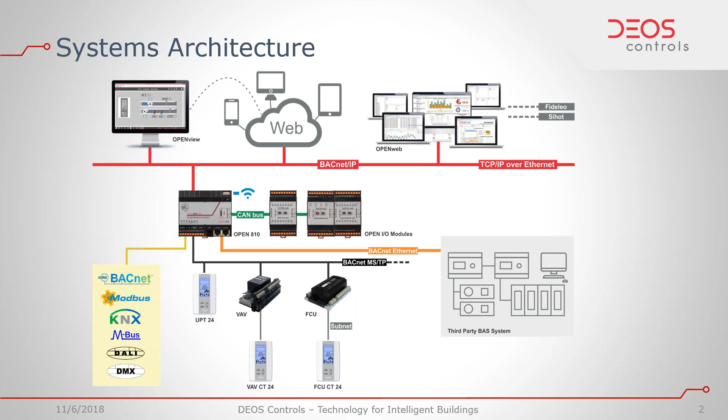Now, I will start out introducing a little bit what we have. We have everything every manufacturer or any supplier has. We're using I/O modules, we're using CAN bus, we have our own web browsers, our terminal devices. We're using it as an integration tool for Modbus, KNX, M-Bus. We're doing some M-Bus metering in North America right now, especially in Vancouver. KNX is more European, and DALI is more on the East Coast. So we can cover a wide variety of integration units.

This is our Open 810. Our Open 810 has CAN bus, RS-232 ports, RS-485, and 2 Ethernet. It's a switch, and it comes with 1,000 BACnet points and 1,000 Modbus points. When you have a KNX version, you have 1,000 data points, and DALI up to 256 addresses.

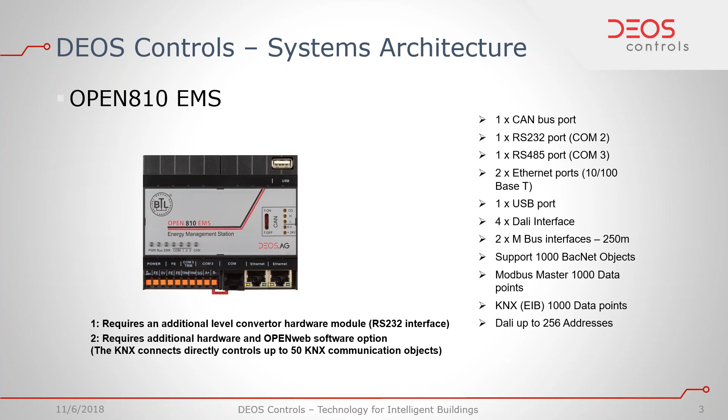Now we have two things. You can either plug it together and put the jumper in here, or you can mount it. You can run it separate with a PKM. You can run up to 5 kilometers. You can put I/O modules throughout the whole building.

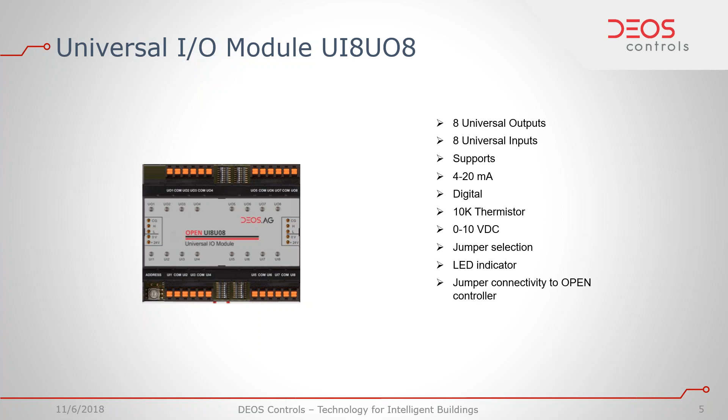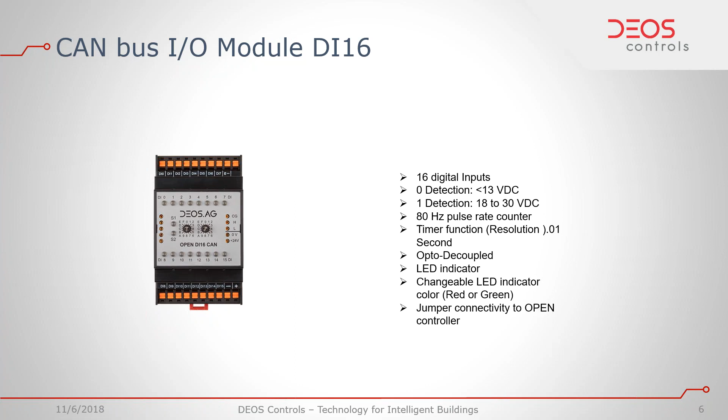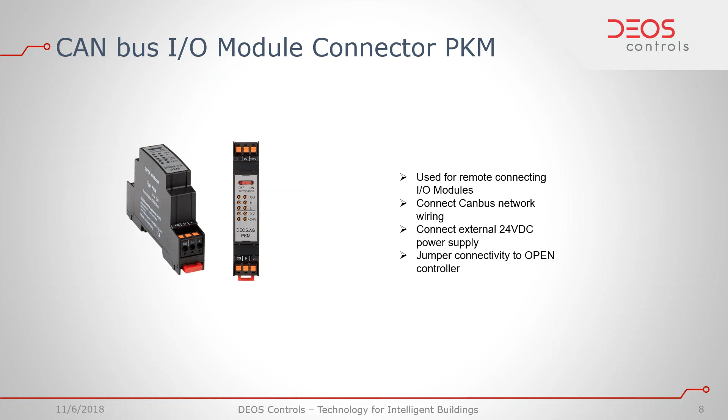And this is a PKM. When I want to mount it remotely, I can plug it in and then I can run to my next module. I will show you here, and then it will be sitting together in a block like this. So I'm coming in here. I can put an external power when I want. When the distance is too great, I always recommend putting an external power, this relays it up, and then go with the network out and go to the next block of I/O modules.

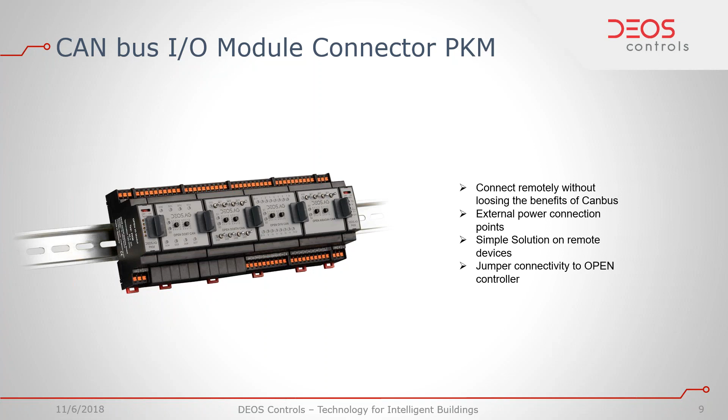It's very handy when you have a mechanical room and you have an MCC center. You put the PKM module over to the MCC center, run it in CAN bus. CAN bus is considered to be an internal network. This is how it works. You come in, and then you have CAN bus, and then you can run up to 5 kilometers. So this is the distance which we have.

So now I have to see, can I move this a little bit down here? Okay, I can. So I don't break anything.

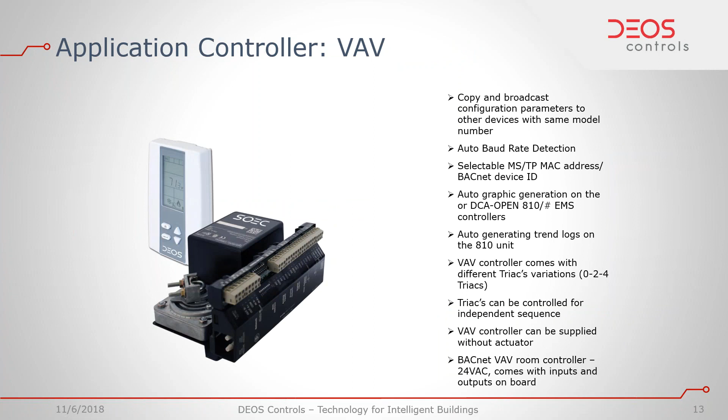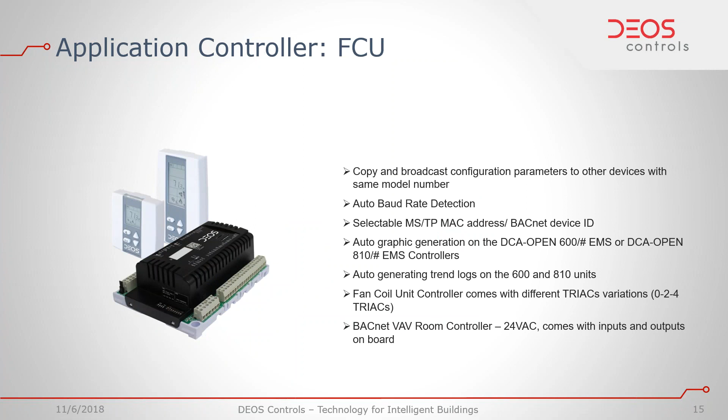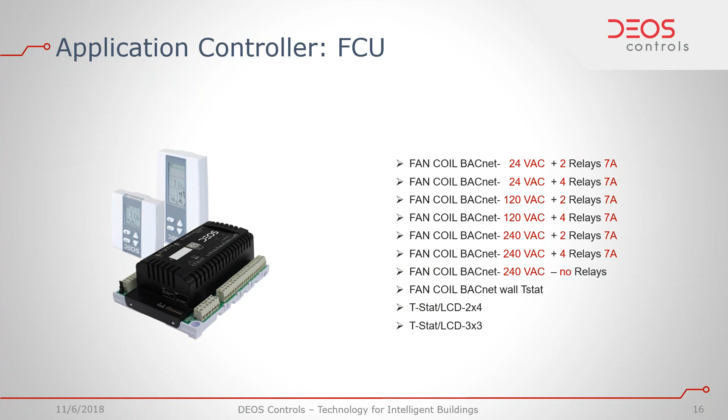So this is the application controller, the UPT24. It's similar to what the Honeywell T7300 is. It has a time clock. It has inputs and outputs on board. It's a very nice product because we're using it for rooftop units where we daisy chain them and then put them on an 810 and host it on the web. It's a very versatile product and people like it, and I hope you will like it too when you try it.

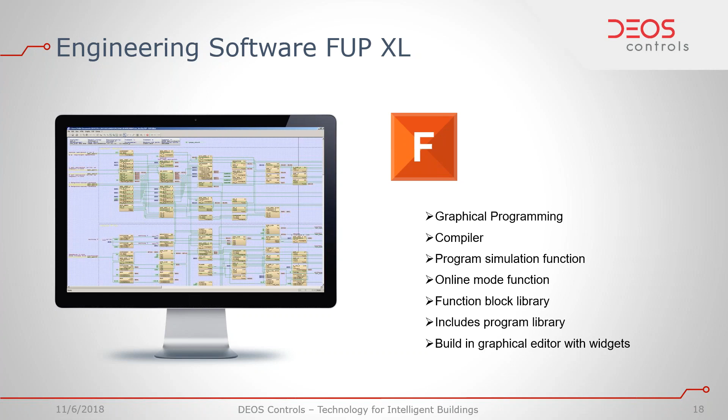Then this is our engineering software, FUP XL. On level 1 and 2, you don't need it. When you come to level 3 and 4, this is where you start doing the programming with it. Everything is function block. I don't know how many people know Tridium. When you know Tridium, you will see right away a lot of similarities to it. And when you dive in a little bit deeper, you will see we do some things differently than Tridium, especially when you bring in some points and you're programming.

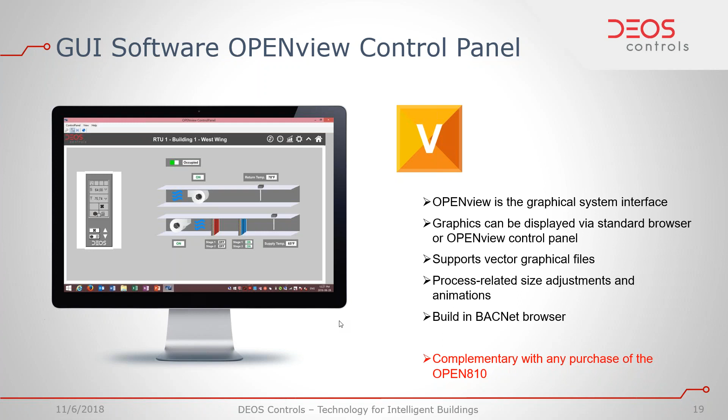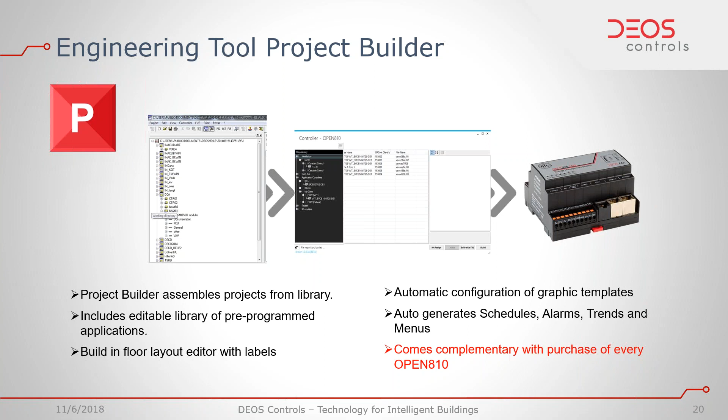So this is how you download it. We also have peripheral sensors. We have energy meters. We have everything that everybody else has too.

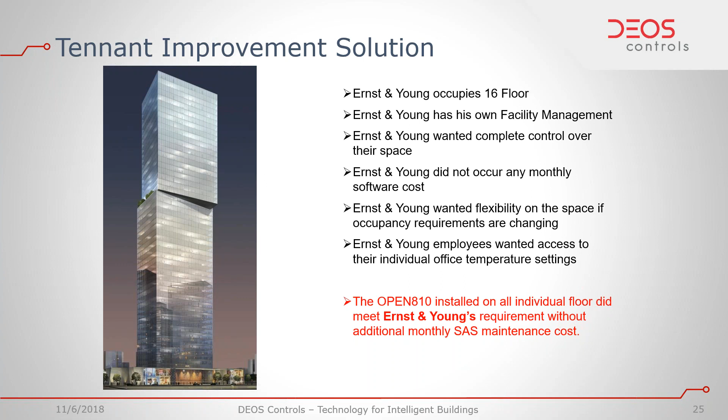Now, one thing we did was a tenant improvement project. It was Ernst & Young. Ernst & Young owns 16 floors of this building. He did not want to pay any SaaS costs. He said, I have my building, I have my floors, I want 16 floors, and I don't want to buy it. The 16 floors are mine. I don't want to pay any licensing fees or any annual renewal fees for service.

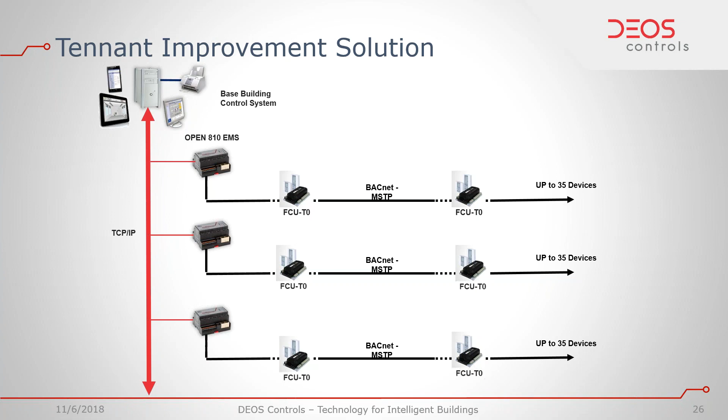So what we did, we put in all these fan coils. It's 16 floors, I think it's over 560 fan coil units. And this is how we did it. We put an OPEN810 on every floor, which hosts all the graphics. It hosts all the floor plans, all the alarms, all the graphics. And they are daisy chained. And here you see on every floor, it's an 810. You click on it and then you jump between the floors.

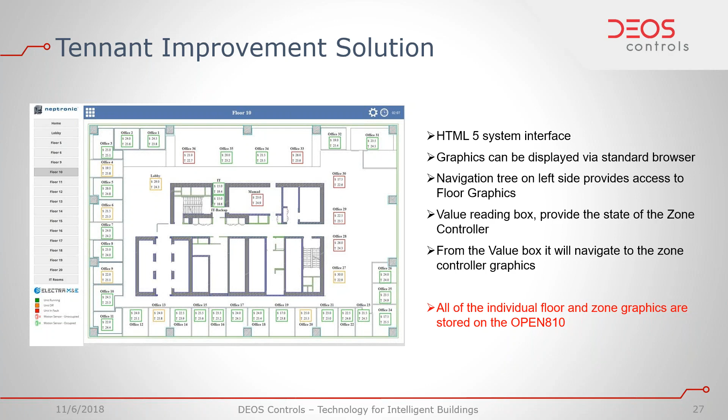I go between them. And because you're hosting everything, you can tell the front end, the enterprise solution in a building, how many points you want to give it. And what it does, it reduces the SaaS cost for anybody who is in a building. We're doing this one, 16. So this is the typical floor plan, the equipment graphics.

And usually it's very efficient to engineer. This is why we're very strong on it. We're very efficient. Anybody who wants to put the system together can do it very simply. We show him once, and usually they can do it.

Sometimes they come and say, here in our case, it's Engenuity. You would ask Engenuity and say, hey, listen, I have a tower with, say, 40 floors, and I have fan coils, 6 types of them. And then Engenuity would say, okay, you need 4 templates, and we'll give you a price. And then you would have it right away. The 810s would come right away loaded with all the templates and the floor plans. Does it make sense? Oh, sorry, I don't have feedback.

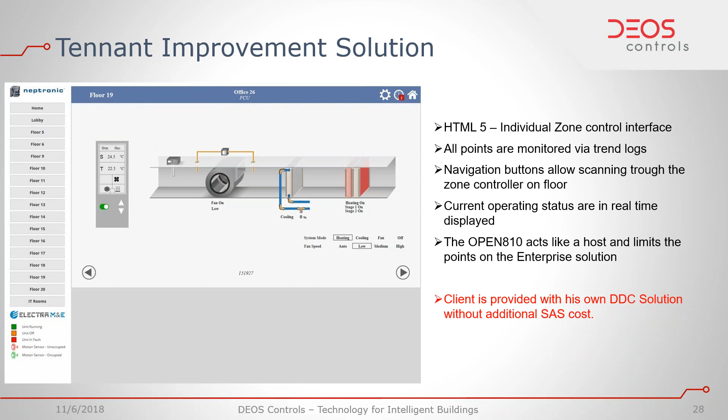Okay, now with conversion and enterprise, you have your VAVs, and then what usually happens, you have a plant controller with routing capabilities, and then you go to the enterprise. What we did, we took out this controller, put the MSTP on here, and host everything on here. Alarms, graphics, floor plans, everything sits on here.

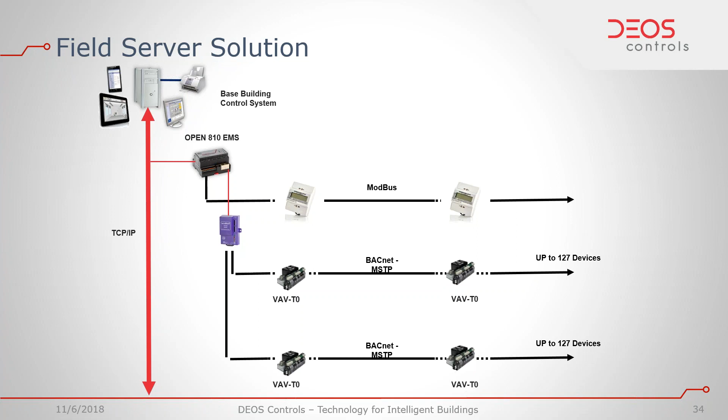Then this is where we do a media conversion, where we have BACnet, and when you want to add on, you can put it on here because you have 1,000 BACnet points or objects available on every 810. So here we're going with Modbus and BACnet MSTP. For metering, we're doing a project right now where the office system does metering with Modbus. So we have both of them on here.

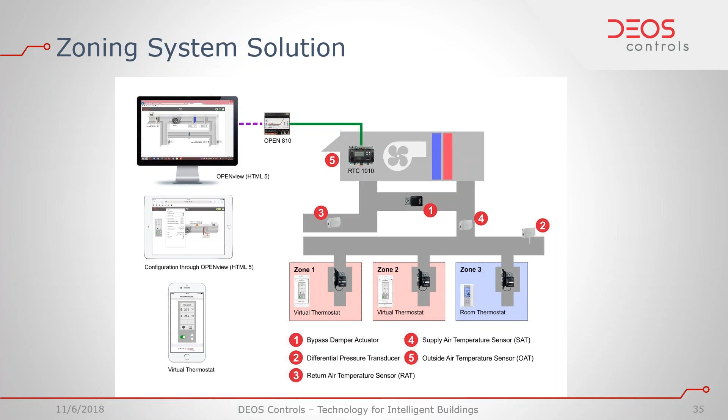This is our zoning system. After this presentation, we will go in and I will show you how to hook up a zoning system and how to configure it. This is our metering solution. The widgets come right away. Any meter which you purchase from us, in every 810 the widgets come right away with it.

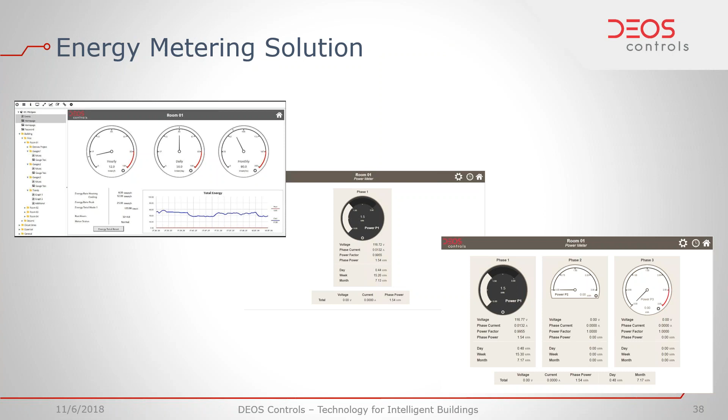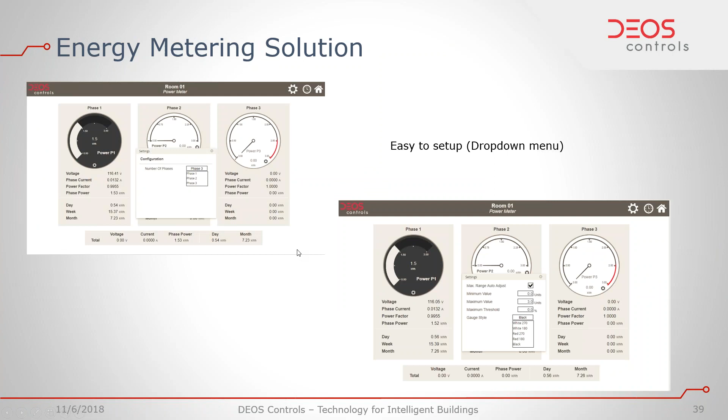I will talk a little bit about the widgets, but this is a different topic. As you can see, you can customize your widgets, your meters. You can change the look and feel of the meters. And everything we do comes with trends.

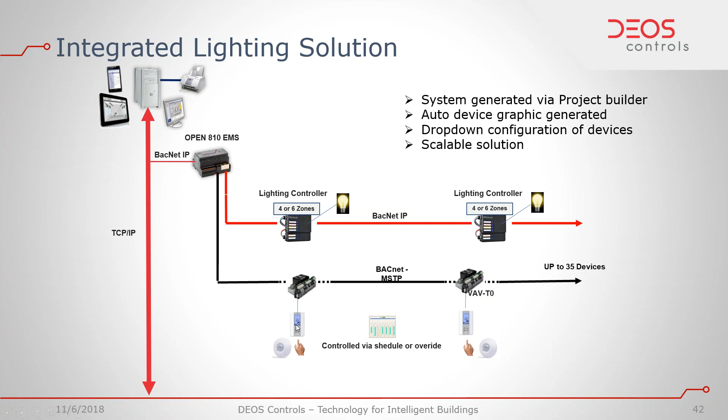Lighting solution: we have a small one, IP zone controllers, which goes in the space. From here, as you have your MSTP devices, you can put the motion sensor in, so you can turn it on with the start. Again, everything comes with

trends. Now, what we're going to now, I will show you how to do a zoning system. This is our zoning system level 1. As you can see, we're talking here HTML. I go to my home page, the controller comes preloaded, and this is what the client would see. This is when you buy from Engenuity an 810 and say you have 1 rooftop unit or 2 rooftop units. Each rooftop unit has 5-6 zones on it.

Now we go there and then we tell it what it is. We have zone 1 with say 3 VAVs. We can put zone 2 with 4 VAVs, and it instantly will come up and configure itself.

Now you will ask, why is it red? It's very simple. It's red because I cannot show because of the camera, I have behind me the demo wall where, when I look at the network, I have 3 controllers on there. I have the 877001, which is the rooftop unit controller, 877002, which is the VAV, and 3, it's the VAV. The other ones are not existing, either they're offline or the communication is broken.

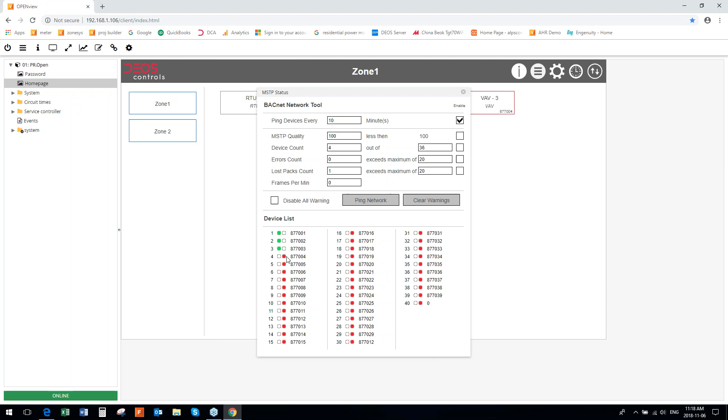I can tell you it's not broken. I don't have it hooked up on my demo. I have only 2. So what I do, I click it off, take it off, and then you will see the 3 rooftop units. Now what we can do, we can say, okay, this is Engenuity level 1. So I can label the entire project as I'm going.

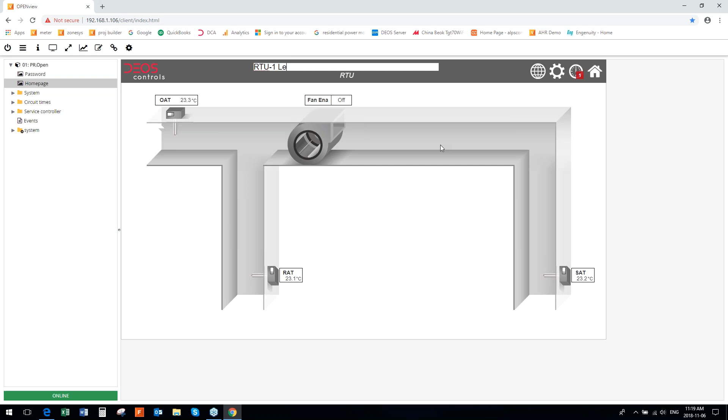So now I'm using the rooftop unit. I label my rooftop unit. This is RTU1, lower zone 1, say, level 1. Then I start configuring it. I'm going here and now I'm assembling my solution.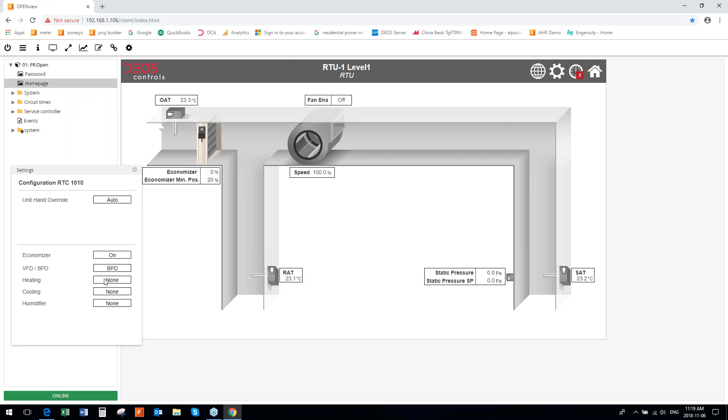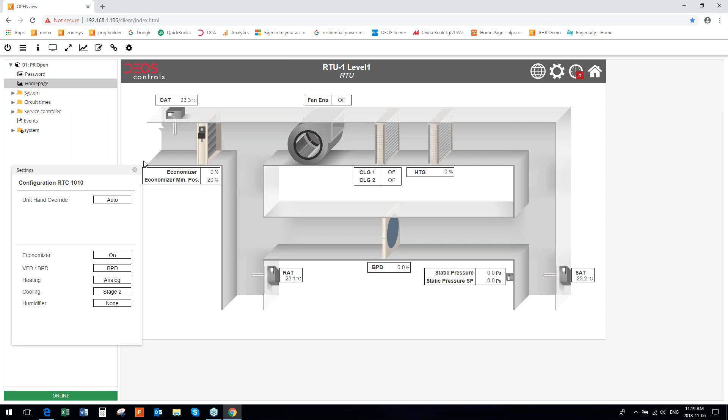Do I have an economizer? Yes. Do I have a variable speed drive? Or do I have a bypass damper? Do I have heating? I have an analog. Cooling, I have 2-stage. Humidifier, I can put the humidifier on there or not. So now my system is done. I'm finished now.

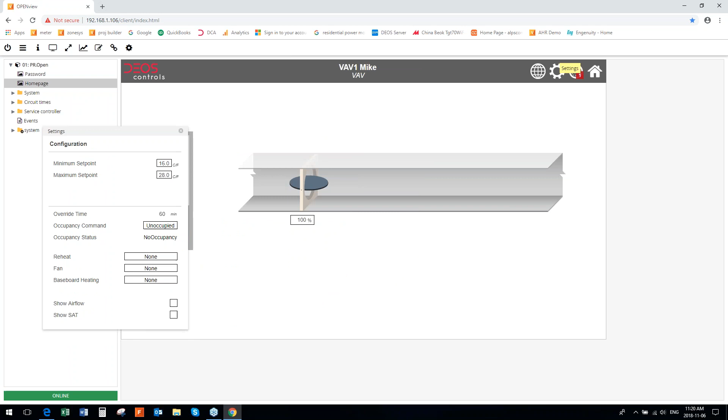Now when I go here and say my VAV, I say this is my VAV, this is VAV1, Mike's office, and then I'm assembling it. What do I have? I have a valve direct acting, I can either have serial or parallel, and I have a baseboard heater, I have on and off, and I show the flow.

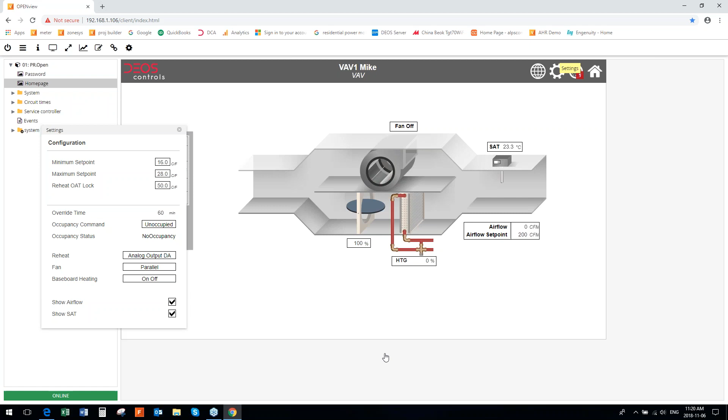Now, if I have an error, the system will right away tell me, hey, you have a problem. You have a fan and you have a baseboard heat additional. I cannot do this. I have to put the analog valves there. And the analog, I can make it 100%, or open, or closed. So now it right away takes the error out.

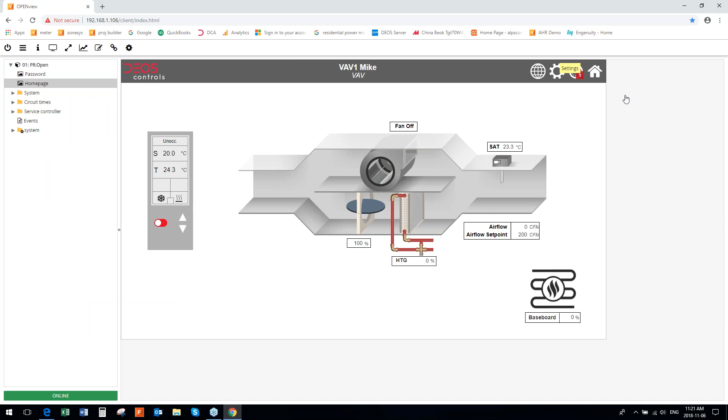Now I'm setting up my schedule. Today is, what is today? Tuesday? Yeah, today is Tuesday. I put my schedule in. And did you hit a click?

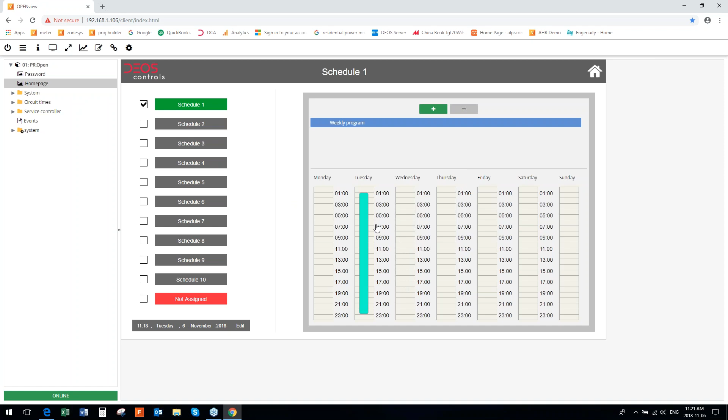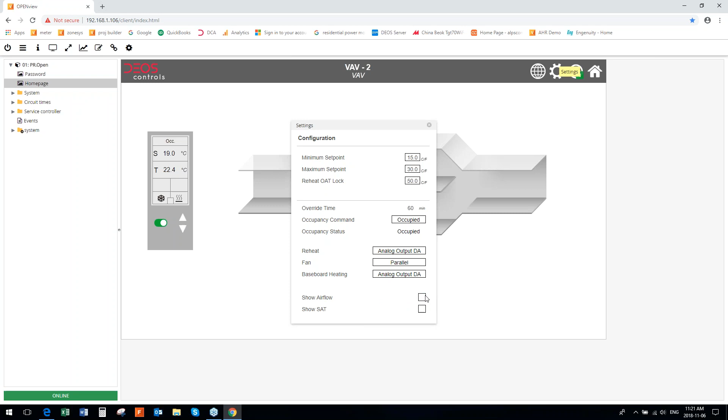It already started clicking. I have up to 10 schedules. Now, when I put my schedules in there, sorry, I can take it off. Or I can write how I want to have the schedule. Then I'm setting my second VAV up. I'm doing the same thing. I have analog, I have parallel, and I want to show it. And that's VAV2. This is John.

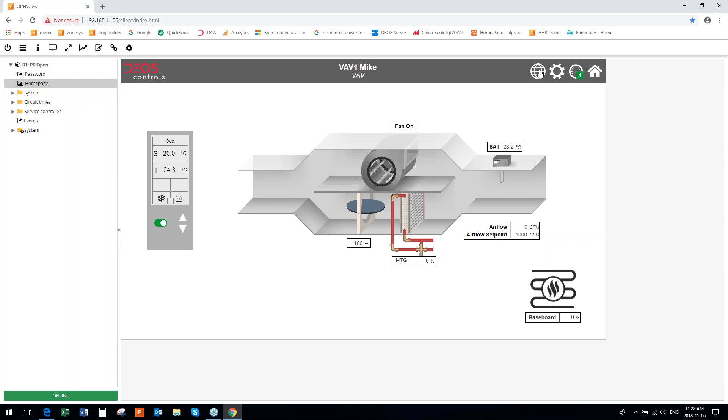So now you're finished. You have the Engenuity level 1, you have rooftop unit level 1, Mike's office and John's office. Now, the thing you want to see is, you're finished. Now the balancing guy comes. He goes here, and again, you give him access to it. He goes, and then he has all the points. And this is what you're doing right now.

You're writing to the point. Now you're putting all your settings in there, K factor, minimum flow, maximum heating, minimum. Now I'm going here and I say, okay, I'm going in the balancing mode. I'm closing the box.

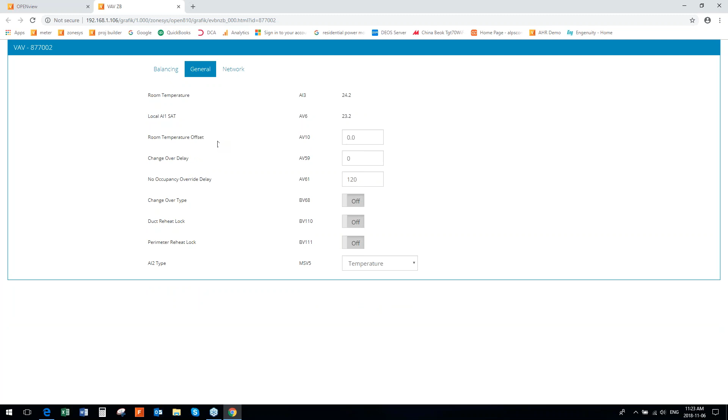Sorry. And what it will be doing, it will right away count down. The box is closing. Now I'm looking at my graphics. My graphics is closing too. My graphics is working, and I can start commissioning it and balancing it. Now I'm finished. I'm doing my calibration of the sensors. I put my offset in there.

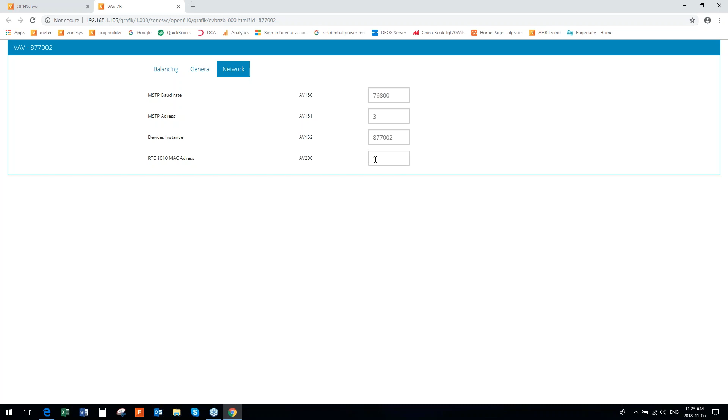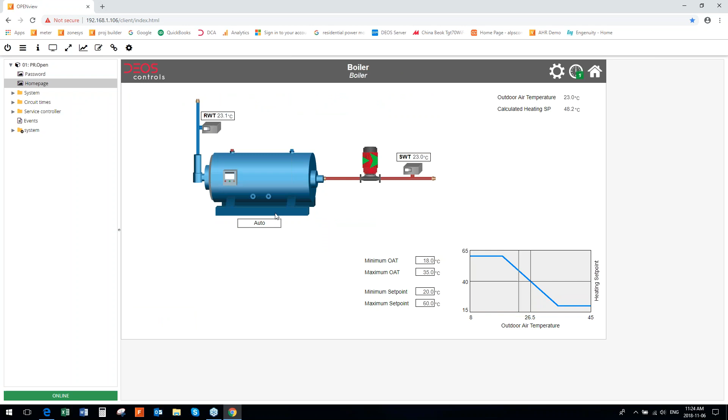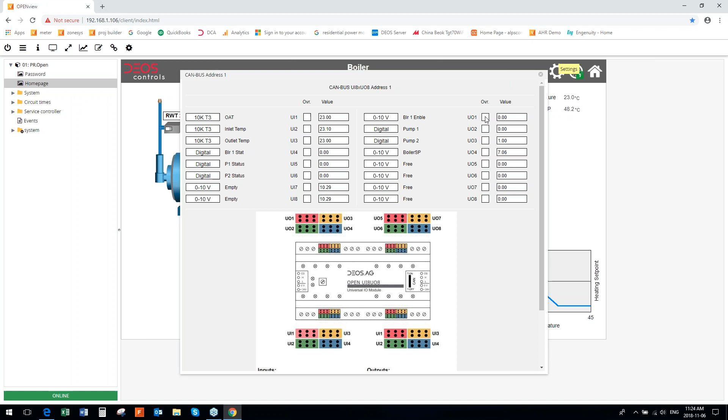Now I can go right away and it generates it for me, and this does it with everything. Everything, when you work with our IO module, it will right away generate this template where you can override the points. Now when we have this, I can change my setting. I can say this is 21, this is 30, and on the set points this is 22, and this is 45. And you see right away it calculates the set point and the outside air temperature. This right away calculates your reset temperature.

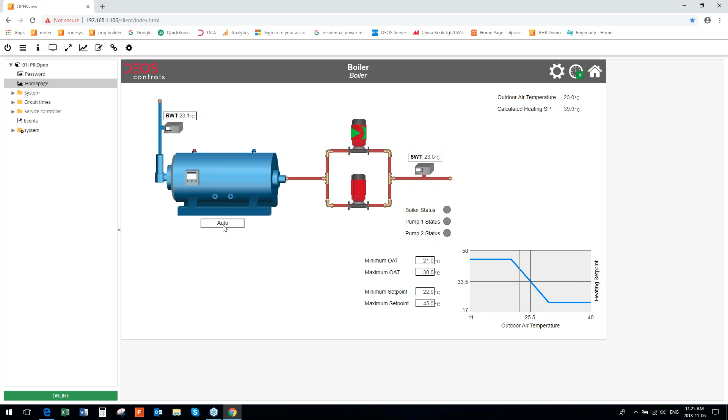Now I realized one thing, I made a mistake because most of the clients are coming from the US and not from Canada. So what I can do, I can override it from here, and you will see the pumps coming on and switching back and forth. And this is your system. Now you have everything done.

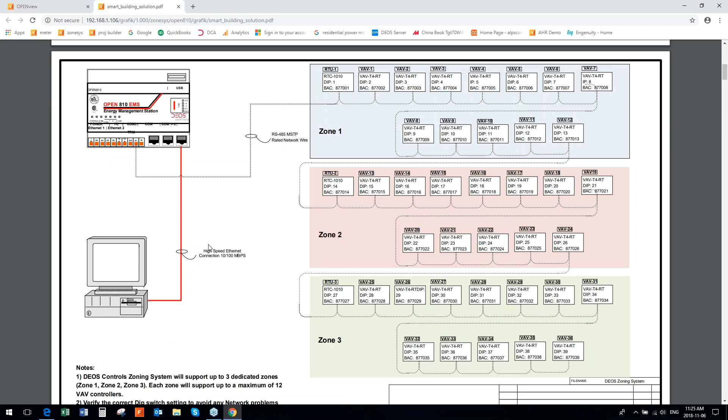You want to have the drawings. So the drawings come automatically with it. And what you see here, you have one rooftop unit, 12 VAVs. This is all the wiring. This is all the dip switches. This is how you wire everything up. And then when you're finished, you're finished. And also, everything you do, you have an event in there. It right away tracks who is on there, what you're doing, how you're doing it. And from there, you can have all your alarms and all your trend logs.

So Mike, I have to ask, does anybody have a question? Mike, can you relink it? So far, I haven't seen any raised hands, and there's no questions in the questions box right now.

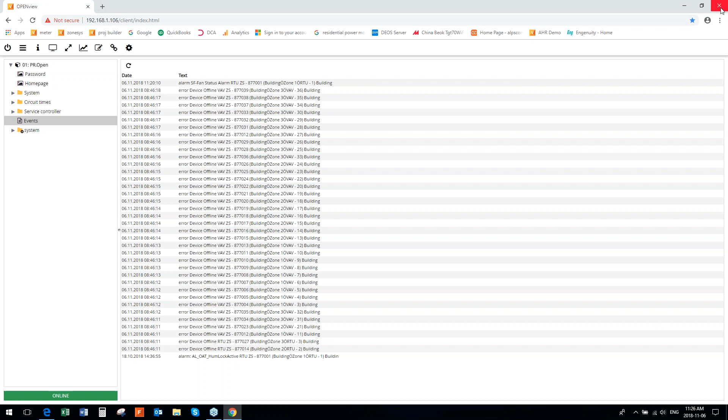Okay. So now, the other thing is the project builder. The project builder, as I said, comes complimentary with every 810. Now what we do, we go here and log in. We're creating a project. We call it Engenuity. I deleted what we did yesterday, Mike. So this is a library. Any job which you're working on, you have an engineering file. Now I go here, I open it, I call it Engenuity, and then I have a basic here. This basic is very simple. It comes with four levels, 4 zones, and then I put some rooms in there.

Now what I can do, I can add on rooms, I can take them off, I can take off an entire floor, I can add on an entire floor. So this one is very flexible. Whatever you want to do with it, you can do. Now the nice thing is, I can go here. I can say RTU-1. I have VAV-01, VAV-02. So when you work from an equipment schedule, I can copy and paste. I can go here and then paste.

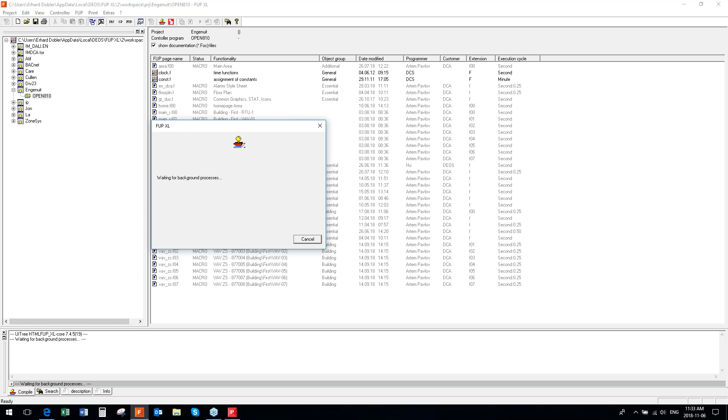Okay, now it's done. Now I'm done here. I can close. Oh, sorry, I made a mistake. See? Edit. Open. Controller. Open. So now we have it built. Now I can upload it.

See here, this is what the Engenuity is. From here, I could now zip it and then send it to you. And when you open it, there's the uploader. You unzip it, launch the uploader, put the IP address here, and load it. If I loaded it now, I would load it into our engineering department's controller. I don't do this right now, but this is how it would be working.

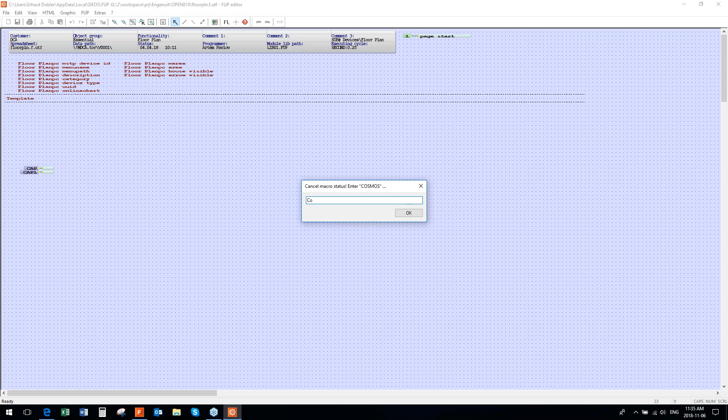Now, from here, we can close this, and then we open the project builder. Because this is for the smaller zoning system, I put a floor plan here. I open it. We did it because we wanted to get rid of a couple steps when you work with it. You're converting it right now as a file so I can work with it.

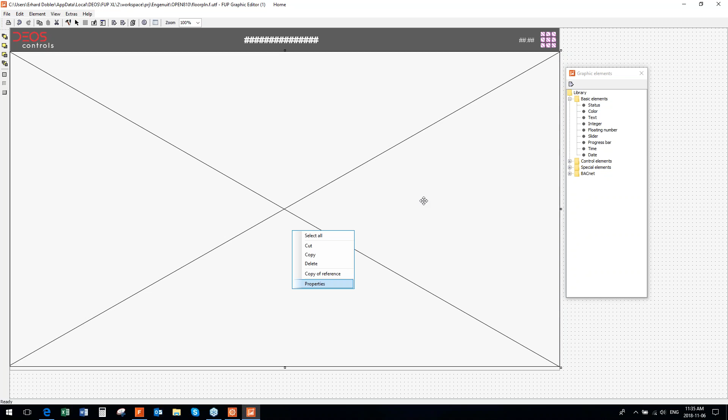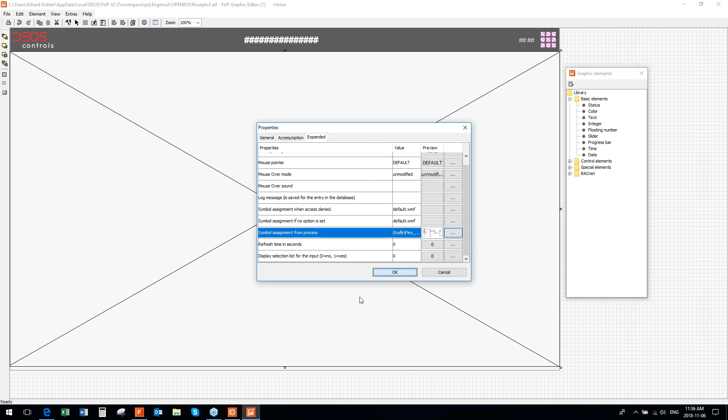We did this so you don't have to draw things. This one here comes right away through from the project builder, how you have it set up. Then here is my engineering tool where I go to basic element, draw it in. Symbol assign from process. So I'm putting in my floor plan. It's only a small example of how we're doing it. Let me save it.

Now I want to put in the macros which we did see on the EY tower. So I'm going here, going to my first VAV, open it, and now the program which writes itself in the background, you will see right now. And this is what the program is in the background. Let me see this here. Now what we did, we made some icons. When I go here, this is sizable.

Now, I can put it wherever I want. And this is for the VAV1. When I go now to the VAV2, so you get the point. So this is how you would make the floor plan when you go from level 1, where you only have a system display, to level 2, where you're doing floor plans. This is how you would do your floor plans and put your macros in there.

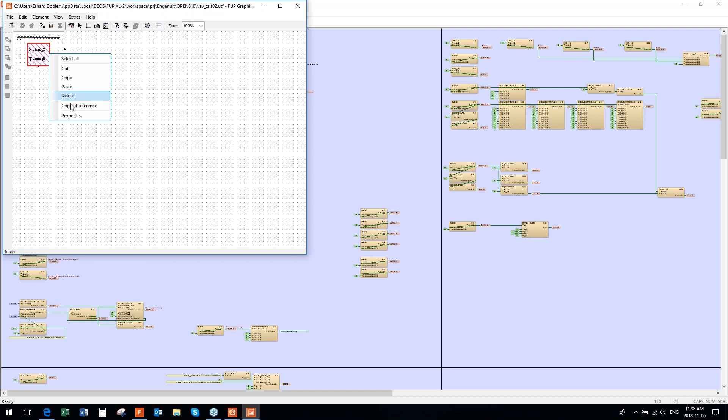Right away, everything in the background would connect. Oh, copy of reference. Would right away connect, and all the items to the floor, to the graphics, to the equipment graphics, all the alarm points would be coming through right away. When I would load it, everything would come up right away. All the descriptors, everything.

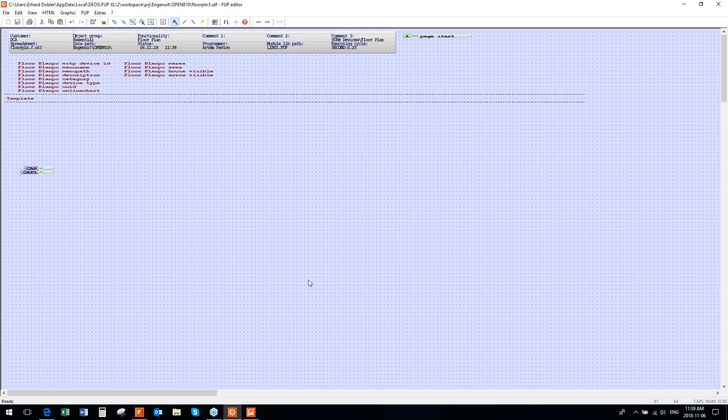Do we have any questions? Mike? I'm not seeing any hands raised right now. So I think that means you've done a good job explaining it. Okay. Yeah, this is sort of how you do it.

And like I said, you can ask Engenuity. Engenuity can do floor plan graphics when you have some special requests for anything like submittal drawings or something. Contact Engenuity. They can provide you everything.

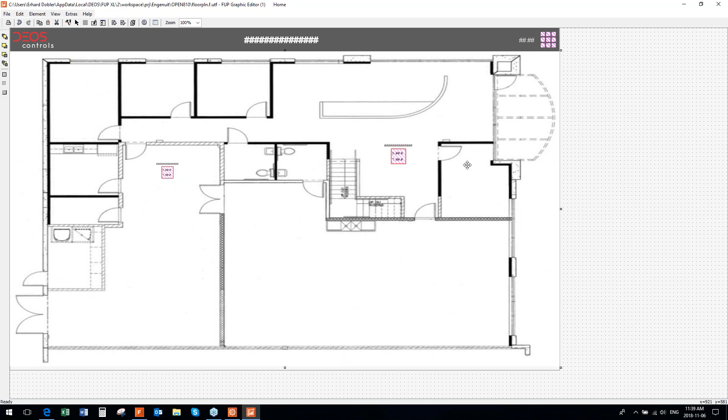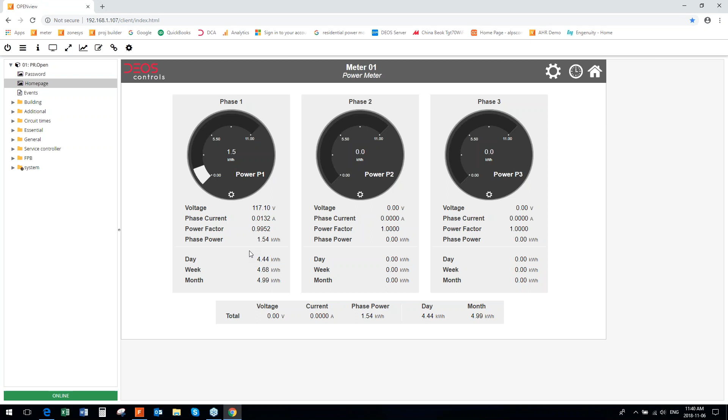And that's it, actually. Now, what I wanted to show you a little bit was the metering. And what we did with it is, any meter which you purchase from us, it comes right away, and the 810, you put it together, it has widgets. And I can put up so many meters per 810, either on Modbus or M-Bus meters, and I can set it up either with 1, 2, or 3 phase. I have only one connected.

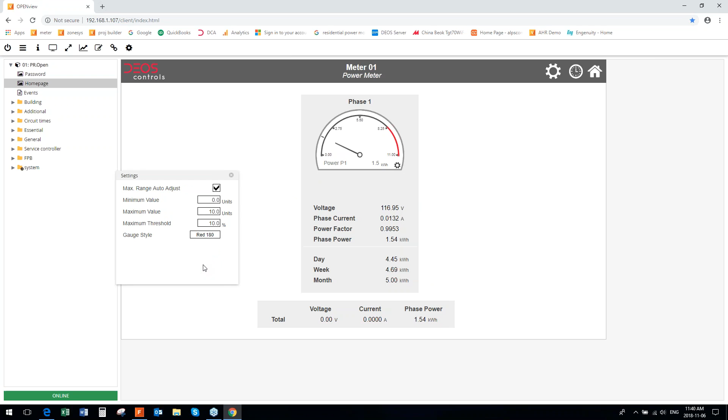Let's go to 1 phase, and then what you see is, when you don't like a dark meter, you have different kinds of meters you can choose from. Now, when you have something which you especially want for yourself, talk to Engenuity. We can make it. There's a special on it when we can use it for everybody. When you want to have it only for yourself, it has a little bit of different things here. I can set it up. I can do the auto range. I have the minimum or the maximum value. It's a threshold 10%.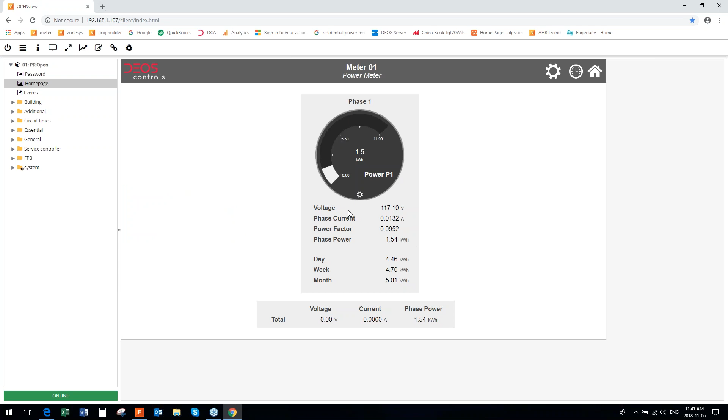And like I said, everything comes with trends. Nothing we do will not have a trend on it. And why are we doing this? It's very simple. It clears the question, should there be a problem down the road. I can scan in, see what it does. I can go back last month. We reset it this week.

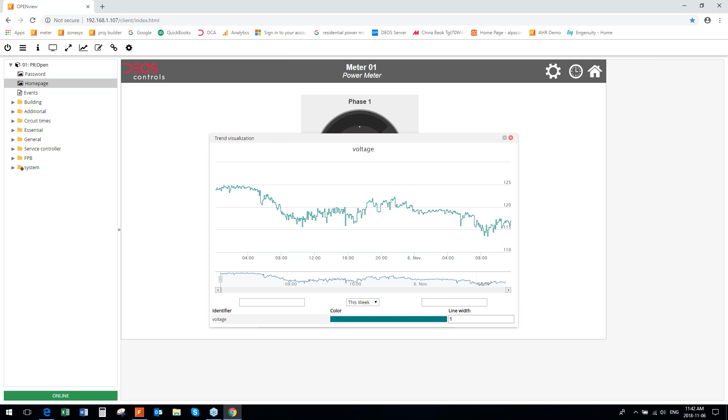Okay. So you have Pro Open A10. I can trend 250 data points, and I can sample every data point 70,000 times. So you have quite a lot of data which you can store on the controller. Again, everything comes with events. On this one, we didn't have any.